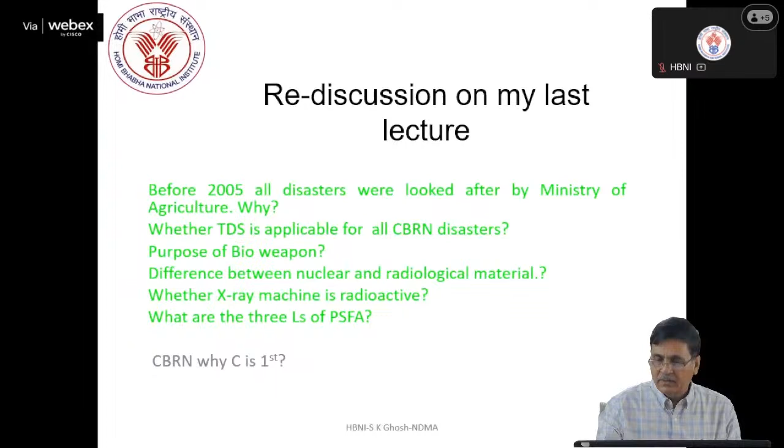And then the last question I gave you as homework: CBRN, why is C first, why not B, why not R, why not N? That answer I could get from the internet, because I used to get this question from all places and different answers are coming. Just have a look at that. CBRN is the ICRC, International Committee of Red Cross, standard abbreviation. Various acronyms may be used elsewhere. Some older English name is NBC, nuclear, biological, chemical. The French give the name NRBC.

And then German, they have given ABC. Then Spanish, they give QBR in bracket N. And nowadays it is frequently used CBRNE, that is, explosive also has been added. So now, however, you can find out the better explanation if possible. This is the explanation I could get from searching different literatures.

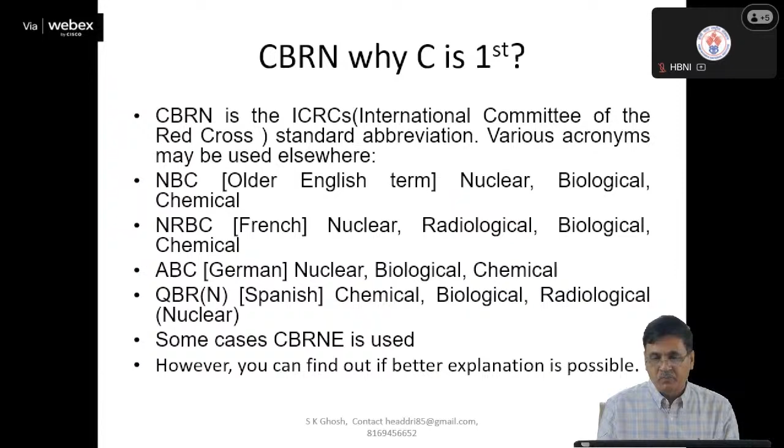Now come back to today's topic. So today's topic is with respect to chemical hazard, risk and vulnerability assessment. How will you be doing it? The objective of undertaking HRVA is primarily to anticipate the potential problem and possible solution. Anticipate. You have to understand the problem first, then you can find out the solution. To help and save lives, protect property, assets, and to reduce the damage and facilitate a speedy recovery.

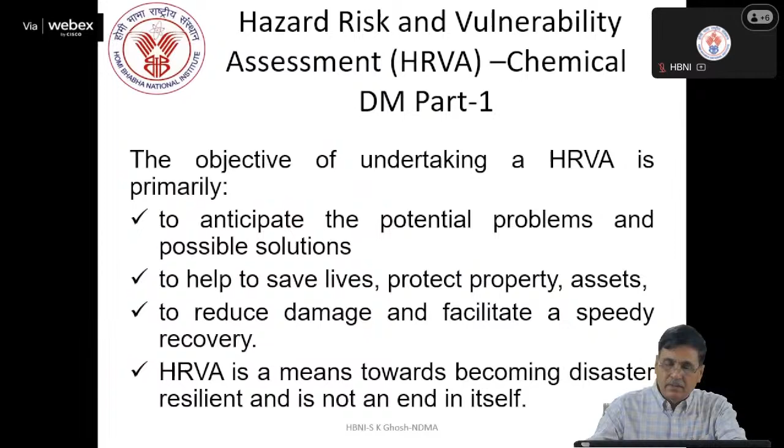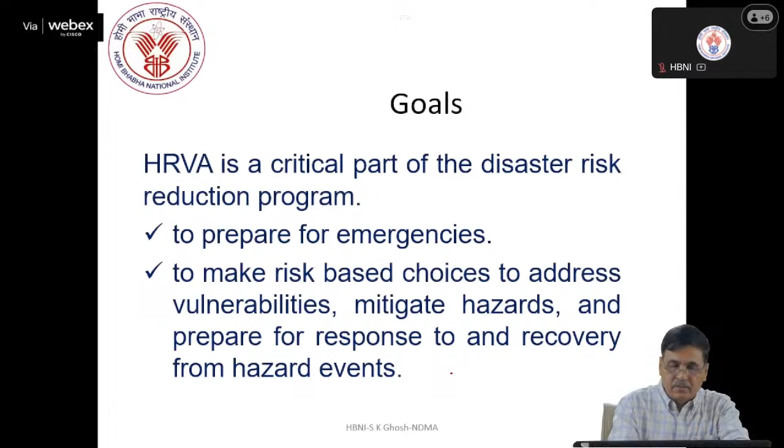HRVA, short form, is a means towards becoming disaster resilient and is not an end in itself. That is the understanding. So now what will be the goal? HRVA is a critical part of disaster risk reduction program: to prepare for emergency, to make a risk-based choice, to address vulnerability, mitigate hazard, and prepare for response and recovery from hazard events. So these are the goals of the HRVA.

Now, when and why is hazard identification required? When planning, designing, and modifying the installation and process. Let it be anything, chemical or something. Suppose an insurance company wanted to have this. This is applicable for all kinds of planning. To ensure that critical examination techniques such as risk analysis, hazard and operability studies are used.

In doing so, see, there are several methods, fault tree, event tree. Those who are a little bit aware of that, see, PRA and PSA nowadays have become a tool to prove that certain events are very rare events, or certain events can happen. So fault tree and event tree analysis are used in many places, and it should take into account the external events as well, internal and external both, in the process of hazard identification. So such studies will indicate where the hazards may be reduced through engineering design or not. That's why hazard identification is important.

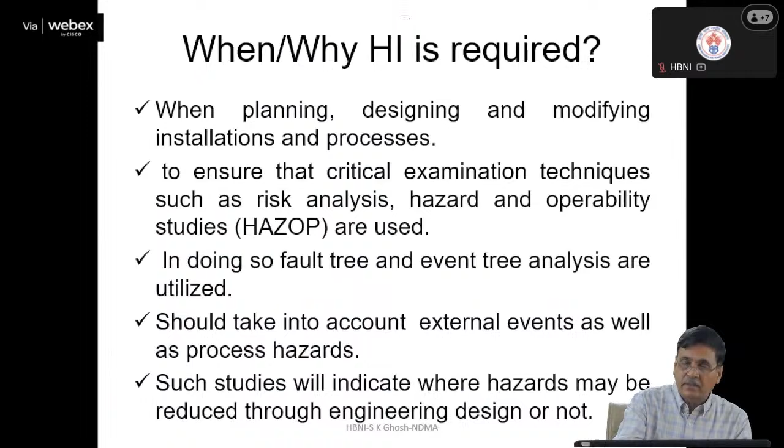Now, usefulness of quantified risk assessment. See, if you are able to quantify the risk, it is well and good. But if you are not able to quantify, then we call it sometimes deterministic approach or probabilistic approach. You have to follow the path. So it will be guiding you for decision making on safety issues. So QRA allows the relative ranking of risk, which risk is more dangerous, which risk you can just manage with some engineering measure like that, and provides an aid for preventive measures.

However, QRA should not be used indiscriminately. You should not always try to justify quantitatively that this event cannot happen. It can provide guidance to the public authorities in land use planning, be an aid for industry in decision making, and could facilitate transparency in the decision making process and allow for a relative ranking of risk.

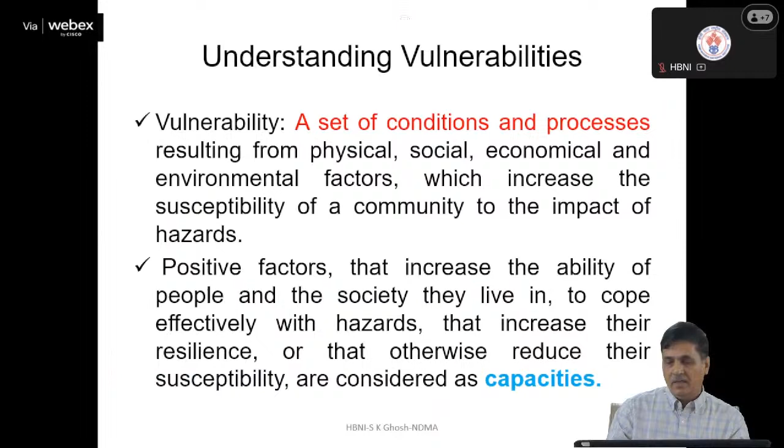So understanding risk - again, I told you it's the probability of harmful consequences. Risk is present everywhere. So how to remove the risk and how to reduce the risk - that is a beautiful formula. Risk equals hazard into vulnerability divided by capacity, as you might have already come across. As capacity increases, risk will decrease. As hazard increases, risk will increase.

As vulnerability increases, risk will increase. Beyond expressing the probability of physical harm, it is crucial to appreciate that risks are always created or exist within the social system. You cannot remove the risk, but we have to manage the risk. How you are managing it, that is important. It is important to consider the social context in which risk occurs.

The people therefore do not necessarily share the same perception of risk and their underlying causes. I gave the example of COVID, that comorbidity was because of different vulnerability aspects.

Now this is a very good diagram I have copied, by this gentleman, 1999, and Kron 2002 - we call it a triangle. If you increase any of the sides - vulnerability, hazard, or exposure - the risk is going to increase. You can calculate it, like triangle area: S into S minus A, S minus B, S minus C, square root. That way, if any side increases, S increases and the corresponding area increases. This is a beautiful diagram, referenced by the gentleman Kron in 2002.

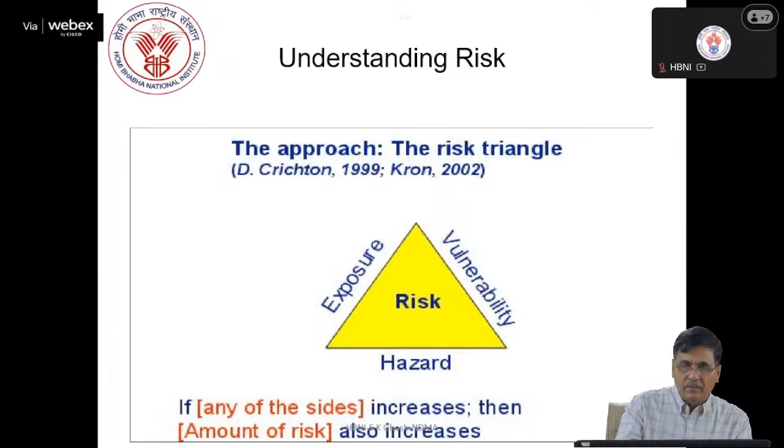So you can have a look on that - it's a good way of representing risk. Now, what chemical agents are hazardous?

Today's lecture is about chemical hazard risk vulnerability analysis, so I have to know what are the hazardous chemicals. That includes substances brought into the workplace and handled, stored, used for processing - raw material, solvent, cleaning agent, glues, resin, paints, so many things. Substances generated by the process or activity - vapors, dust - they are all hazardous material, and substances mixed or produced at the workplace, including byproduct and residue or waste where you are working.

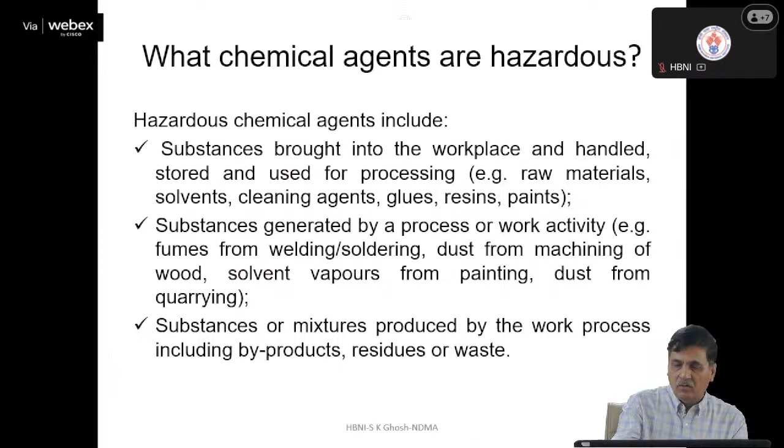Because of what they contain. Sometimes, I will give you an example.

Here, that atmosphere may be very toxic, but if your ventilation is proper and control measures are taken, then threshold values can be maintained. Obviously, this cannot cause harm to the people who are working on it.

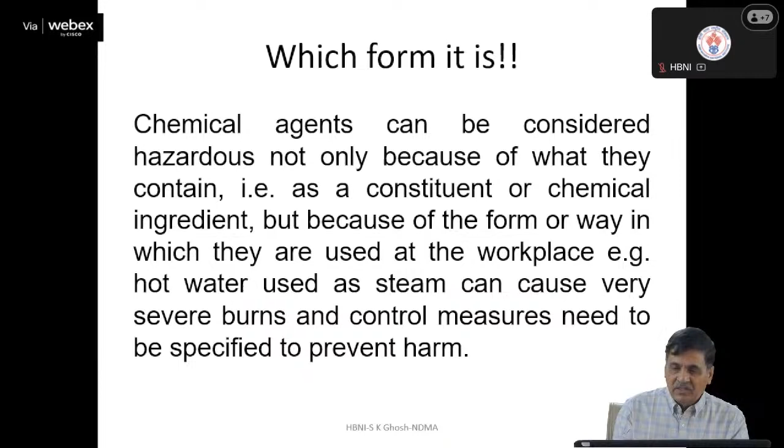So workplace, water, is it hazardous? No. But if you prepare hot water and steam, it is hazardous to you. So the way you use that material gives you whether it is hazardous or non-hazardous. Water, maybe cold water, you may like to drink it during summer, but steam you get burned, so you try to avoid it.

So why control the risk of hazardous chemicals? Why should we control? Because you cannot avoid chemicals. There are lakhs of chemicals, and every day you are consuming chemicals in some form or the other, let it be medicines, biscuits, or cold drinks. Whatever you use is basically prepared with some chemicals, maybe suitable for your body, but sometimes it will cause serious illness, sometimes even death if taken in excess.

The effect of hazardous chemicals may be immediate or long term. Cigarette smoking is injurious to health, it's known to everybody. But still people smoke it for their habits, and it gives a long term impact, sometimes becoming a chronic health hazard.

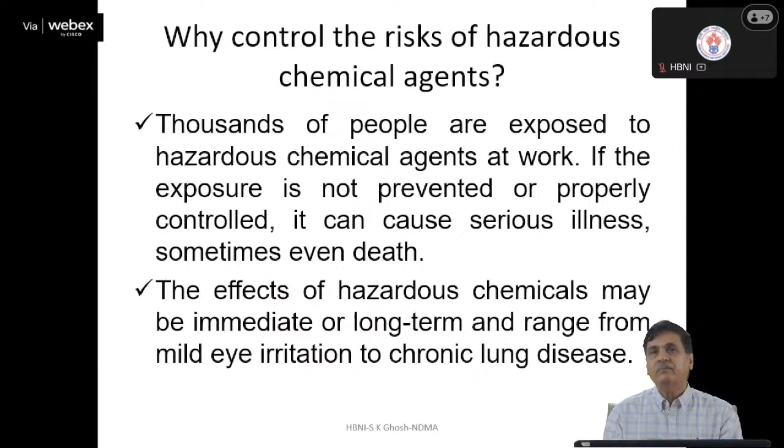So how to reduce the chemical risk? Risk is equal to hazard into exposure into vulnerability. So we can improve our ability to monitor and forecast the hazards.

In NDMA, we have got a common alerting protocol. Those who have mobiles may get SMS alerts. Those present in Delhi area or Uttarakhand, before an earthquake, we are able to give some kind of alert message. People in cyclone-prone areas are also given alert messages. So that is how we can improve our ability to monitor and forecast the hazard.

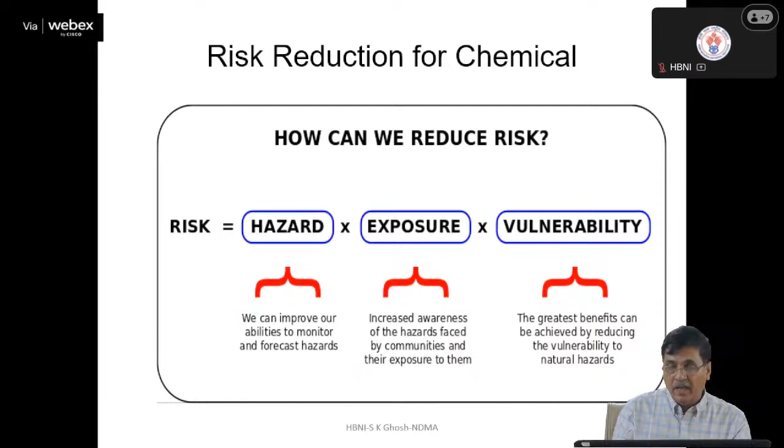Then exposure - increase awareness. If we can explain to the community about the hazard, they may take care and reduce the exposure. Similarly, the greatest benefit you can achieve is by reducing the vulnerability of the natural hazard. So you have to reduce the vulnerability.

So that's the next slide. There is a process - HRVA is a 9-step process. That's the process, I've explained it.

Now this is the book from where I have taken the material. This is a nice book from 2020. I think it has just been put, go down. Not quite. So if you see, it's not moving. It says move down.

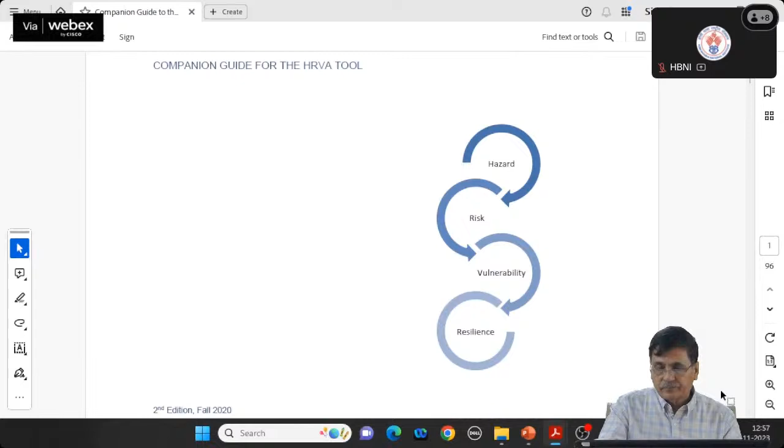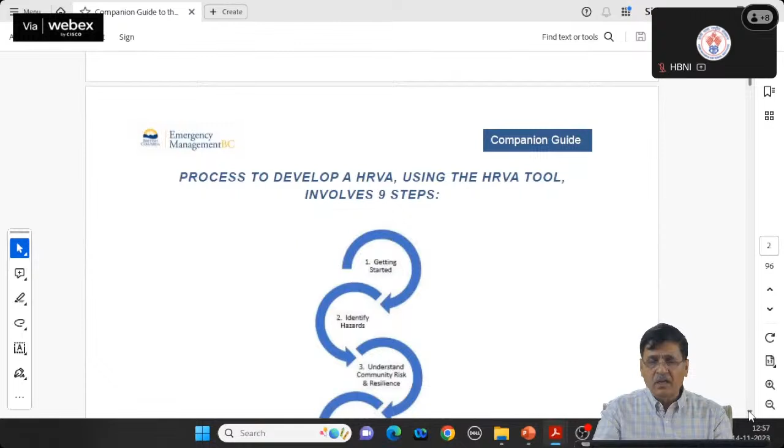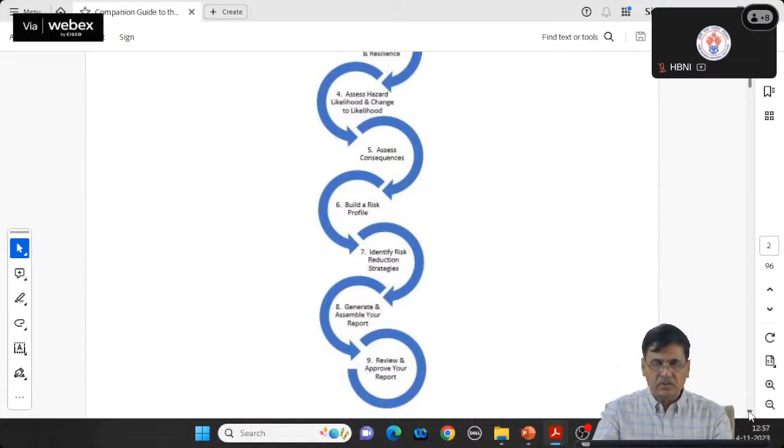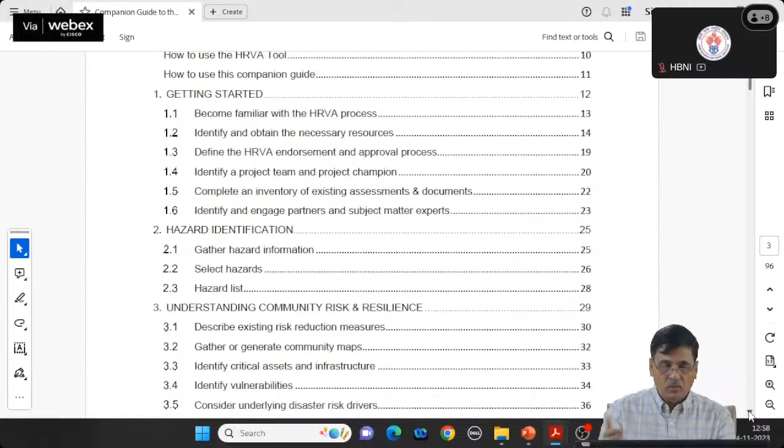So this is emergency - British Columbia has presented it in 2020. It's a very good companion guide, and for those who want further details, the study of hazard vulnerability is 9-step. It's very nicely explained, and for each and every process, not only chemical but any physical process like preparing a building or preparing a dam, anything. These are very good tools they have been given, and I think it is a 96 page document. Just now I'm rolling through, just you can have a look on that. I will not take much time, but this will be available with you.

So this is a 9-step process. I have given getting started. All of you may be knowing www dot, but I have written www.h. The full form is why, when, where, how. If you ask these questions yourselves, you will get answers.

Then only you are starting the hazard risk vulnerability analysis process. So identify the hazard first of all - where you are staying, where the chemical factory is being built. Then understand community risk and resilience, when, and assess the hazard. Choose the appropriate methods.

Methods have been described in the literature. I told you either it can be fault tree or event tree analysis. Assess the consequence, build a risk profile.

Report generation is very important. Unless you generate a report, people will not be able to understand what you have studied and what is the outcome accordingly.

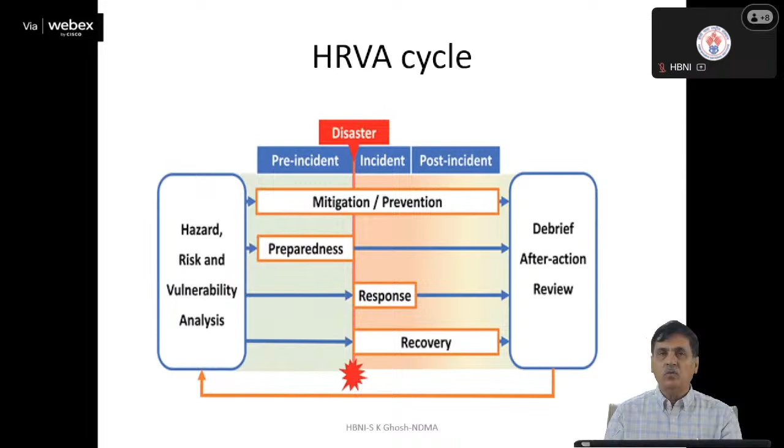Now, effect of hazardous material. Some examples of hazardous chemical effects include, I think Dr. Kunal Sharma already explained, skin burns, irritations, becoming overcome and losing consciousness following inhalation of toxic fumes, suffering acute symptoms such as headache, nausea within hours of inhalation, poisoning, skin absorption.

There are several skin rashes, genetic damage to offspring occurring years after exposure. If you remember our Bhopal incident, still those who are born, they have some kind of defects, genetic defects we call it.

Now, what do you need to do? See, now you are getting trained and becoming experts for hazard risk vulnerability analysis. So assess the risk from hazardous chemical agents at your workplace.

You will be employed or you are working somewhere, you can do the exercise yourself. Decide what control measures are needed. These control measures must be identified and specified in writing.

You tell your organization or your bosses that these are the risks, I need to reduce the risk by so and so engineering measure. Ensure that control measures are fully implemented and operational. Then only your job is over, not before that.

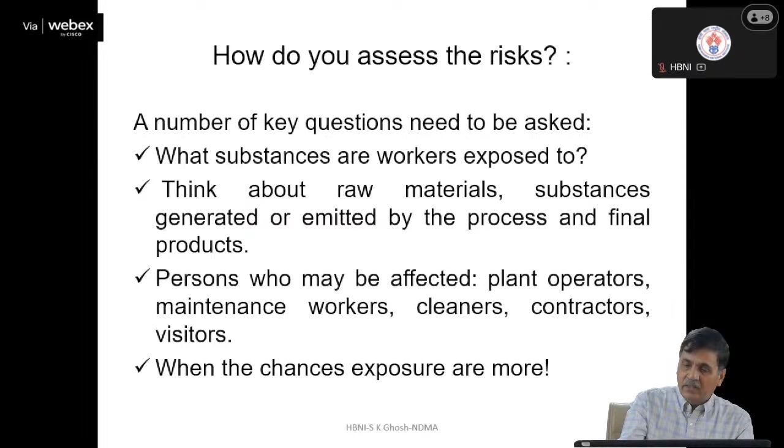See, if you travel through some nearby chemical factory, at night or in the early morning, you will get more smell. You may not know what it is for. Maybe the industry is discharging their gases at night, so you might have observed it. So the chances of exposure are more at night if you travel near the factory.

Now, where to get the information? Suppose you want to build a chemical factory, where to get the information? Information may be obtained from safety data sheets, other information provided by the suppliers, from trade magazines, from plant equipment suppliers, and from specialists working in the industry.

So material safety data sheets are a very important source of information, and you can have it in your premises or factory. You can also get useful information from the internet. Nowadays it is an encyclopedia, nobody looks elsewhere. The internet is a very good source of information, provided you are looking for the particular data.

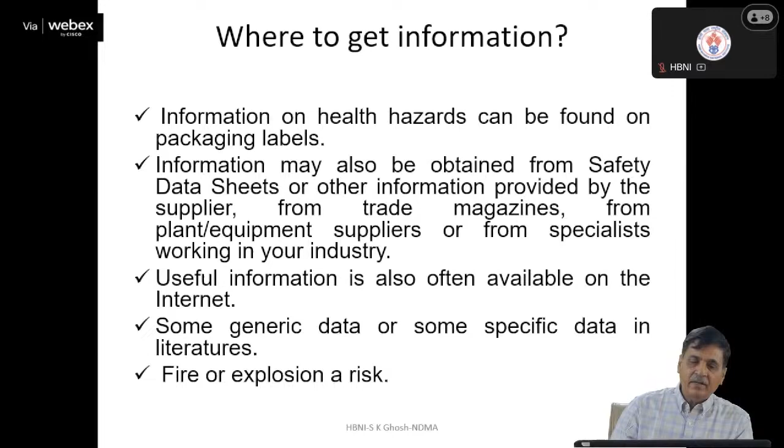Sometimes it may not be available, but with a lot of R&D you can generate it. Some generic data and some specific data may also be available in the literature, and fire or explosion risk will always be there with all chemical industries.

Now coming back, what questions are you asking? What activities can give rise to exposure? Whether it is leakage, failure of some equipment, or mixing of some fluids.

Sometimes we call it explosion happening. If you put some water in sulfuric acid in front of you, there will be an explosion. If you throw a piece of sodium in water, immediately fire will happen.

So what activities can give rise to exposure? You have to understand the process. Under what circumstances may a substance be breathed or swallowed in or absorbed through the skin, that you have to understand. And what risks need to be controlled. Suppose somebody is handling sodium, you cannot openly handle it. You need to have a controlled environment without any air, without any oxygen.

What are the chances of contamination? The word contamination is very famous. During COVID time, people used to say, don't carry contamination, it's a contaminated object. But in the nuclear industry, it is not from today, for the last say 70 years we use the word contamination. But you have to know chemical contamination, how to remove it, biological contamination, how to remove it, like that. You have to ask questions. And how they react with other material. These are all key questions. Once you turn your head and do some work, you will find out the answer.

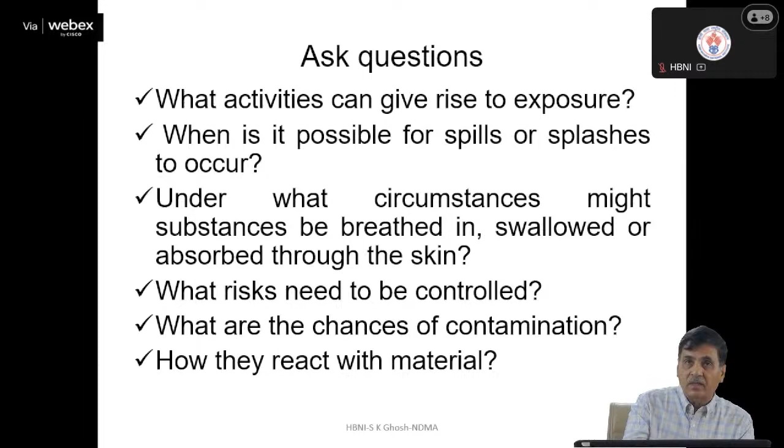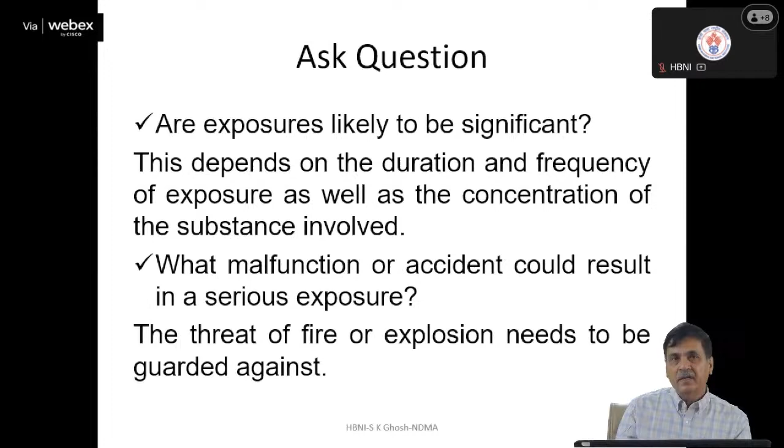Are exposures likely to be significant? This depends on the duration, frequency of exposure as well as the concentration. See, if somebody is passing nearby a chemical industry, it does not mean he will immediately fall sick. But those who are working 8 hours and they inhale, that exposure time is more. So you have to know whether it's significant, how much concentration will be allowed, and what malfunction or accident could result in serious exposure. And the threat of fire and explosion needs to be guarded against.

Now, what you look for. If good practices for dealing with the risk are well established, you only need to identify the relevant measures in writing and check they are in place. Appropriate safety culture at the workplace. Incident information exchange systems and feedback mechanisms should be there. So I use the word safety culture. This is sometimes used very vaguely. People, don't confuse it with our normal culture, where we say, okay, this is the culture of this community. Not that culture.

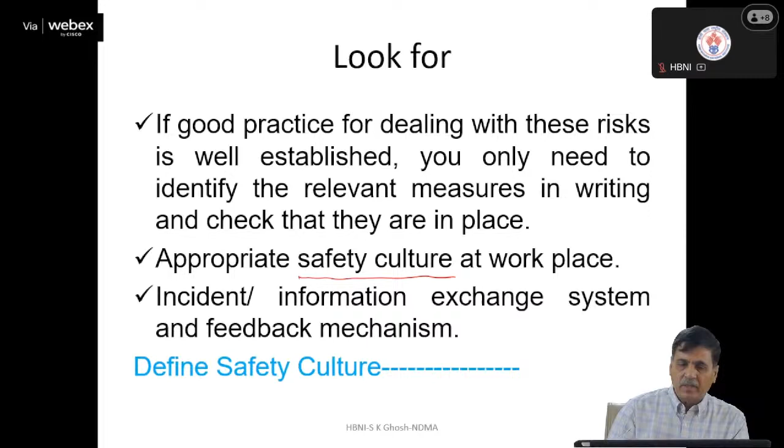Safety culture. Can somebody define it? This is the homework for all of you: how to define safety culture. I will explain it in the next slides, but you try to find out what the definitions are. There is a guide available internationally on safety culture itself. After Chernobyl happened, the safety culture word was coined, and in the nuclear industry there is a very good document available. But you work on that. I will explain it in the next lecture.

Now, how do you specify the control measures? Once you have done the hazard vulnerability assessment, the measures and precautions you can identify. You need to find out what the established good customs and practices in your industry are for managing this risk and check that you meet these standards. Advice on good work practices and standards used by other employers in the same business. Sometimes they do not share the information, but if you get the information, you can reduce your risk factor considerably. Also from plant equipment suppliers, industry specialists, and published authoritative guidance.

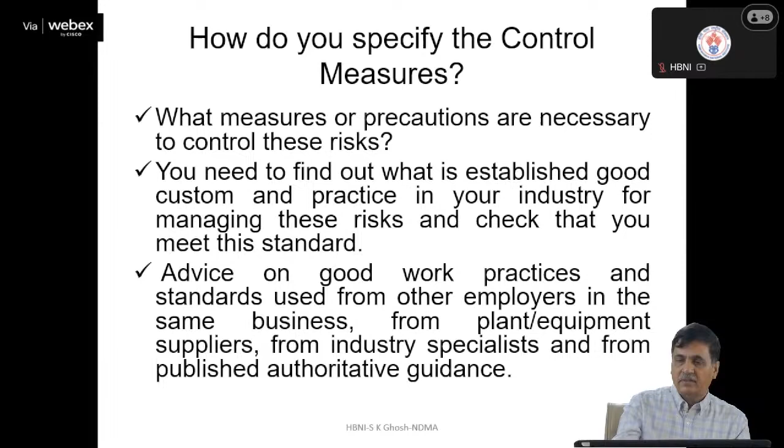Now, when is special attention needed? If your work process is unique, just keep it in mind. See, take the nuclear industry. The international community did not give India the technical know-how in several cases. So this process is unique to us, unique to the nuclear industry. And authoritative guidance and good health and safety practices were not available. So that's why special attention has been given, so the regulations are very stringent for nuclear industries. I will come to it afterwards. The regulation in the chemical industry is not so effective.

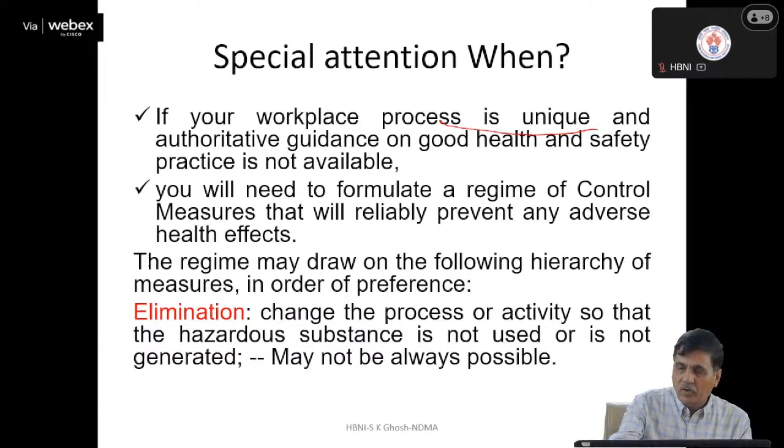You will need to formulate a regime of control measures that will reliably prevent any adverse health effects. The regime may draw on the following hierarchy of measures in order of preference. First and foremost is eliminate, if possible. Change the process or activity. If you find this is the vulnerable area, the hazard area, you eliminate it. How to eliminate? You have to use engineering judgment, and it may not always be possible. Now, the next step you can follow: substitute. If you are not able to eliminate, replace it with a safer alternative.

See, earlier several chemical raw materials used to have some other raw materials. Nowadays they have changed to safer raw materials. You might have seen that CFC is not used. We are using a green material which can reduce the carbon rating. So separate the hazardous substance from the workers. That is also isolation.

And then engineering control. This is in your hand. Use physical measures to minimize workplace contamination, that is, extraction at source by local exhaust ventilation. Even though this looks very simple, in many places you will find that people don't give ventilation importance.

And we call it air changes. Very good practice is that fresh air should be there in your workplaces, with continuous air changes. It may be sometimes 2, 4, 7, 8, depending upon the contamination level or the threshold value of that toxic substance.

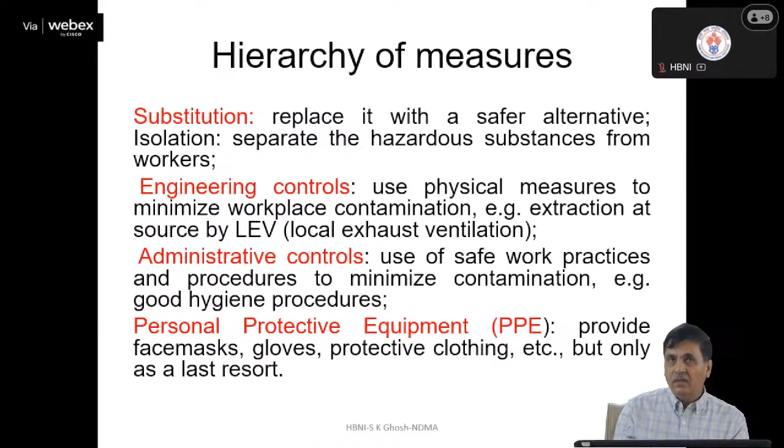Then administrative control. Use safe work practices. Procedures should be there to minimize contamination. Good hygiene procedures should be there. And the last and final should be personal protective equipment. When you have exhausted all other measures, then provide face mask, gloves, protective clothing, etc. You should use this last resort only when you are not able to control by the other measures.

Then of course engineering control has to be there. I already told you that DID, defense in depth measures, always help in engineering control measures. So isolate people from the hazards. For those who are working, multiple layers of isolation should be available.

Of course, administrative control should be there: how many air changes and how many hours you can work there. So there should be several rules available in your factory for those who are operating the factory. And then finally, protect the workers.

I know there is a factory where they store H2S. Any people going to that area need to have the PPE kits with them. Even then, they cannot sustain for more than 2 hours, because the breathing apparatus they carry can give a maximum of 2 hours supply of oxygen. So PPE kits are a must in hazardous industries where there is no other alternative. So you have to follow this hierarchy.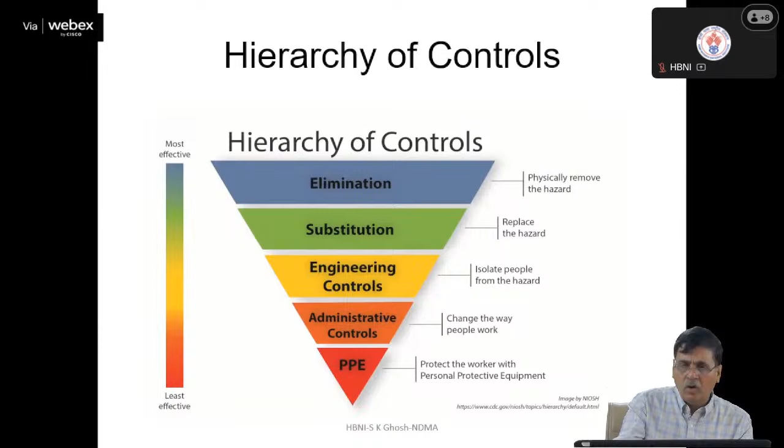And I think if somebody has understood this clearly, he can do a lot for a hazard, risk and vulnerability analysis program. So the control measures themselves must also be checked and maintained at regular intervals. See, you have given the control measures, but they are not maintained.

You may be seeing that fire hydrants are available in every society, in your society also. Recently I had a mock exercise at Delhi airport, and I went to where they control landing and take-off for our flights, and there was a fire hydrant. I asked them to open it, and there was no water coming. I was surprised: such an important installation, a fire hydrant, and water is not coming out.

This happened because emergencies don't happen always, and when they happen, emergency gadgets may not be workable. So it has to be maintained at regular intervals. Local exhaust ventilation equipment should be examined and operated at regular intervals; we call it surveillance. And sometimes it is necessary to monitor worker exposure at regular intervals by measuring concentration in air and ensure that exposure limits are not exceeded.

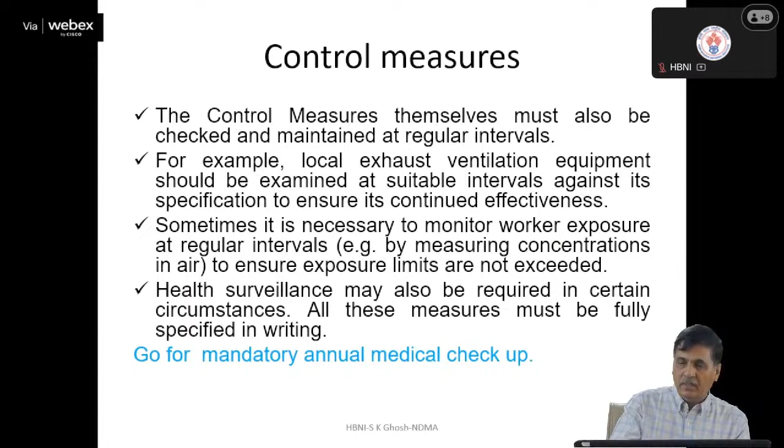Health surveillance. Annual medical checkup is a must for those working in hazardous industry, particularly chemical and toxic industry, and it has been followed in atomic energy. All nuclear power plants, I know, go for annual medical checkups, and if required, they get additional follow-up action. Now with this, part 1 is completed.